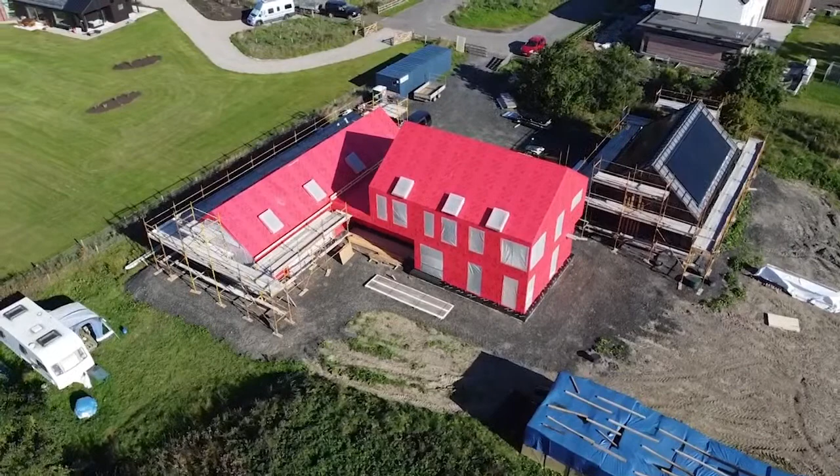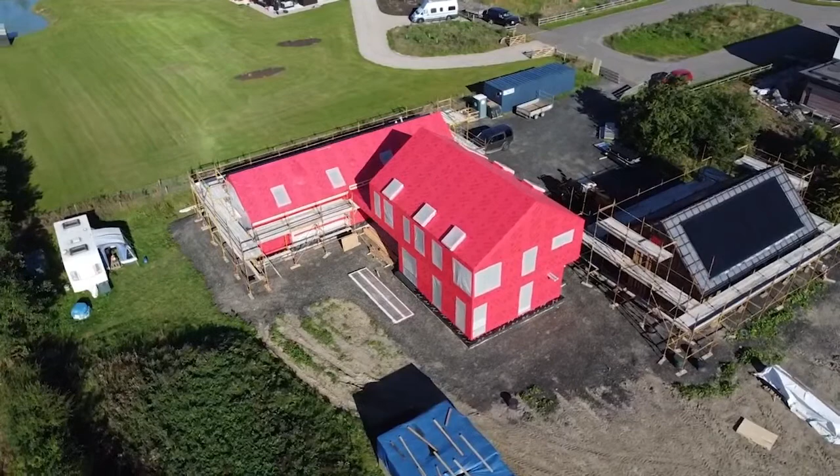Good morning. My name's Frances Strachan-Friar and I'm a Perthshire-based architect working mainly in residential projects and one-off private houses. From that background, designing and building my own home presented a perfect opportunity for a learning exercise, exploring new construction methods, testing ideas and learning new skills by taking a fully hands-on approach on site.

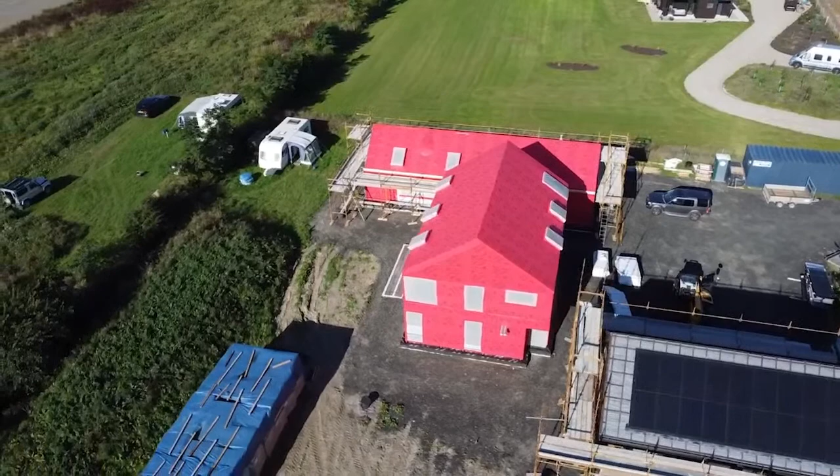We started looking for a suitable site in 2019 with nothing specific in mind beyond a rural site with a few neighbouring buildings, within easy commuting distance of both of our jobs, and most importantly, the site and the location had to just feel right.

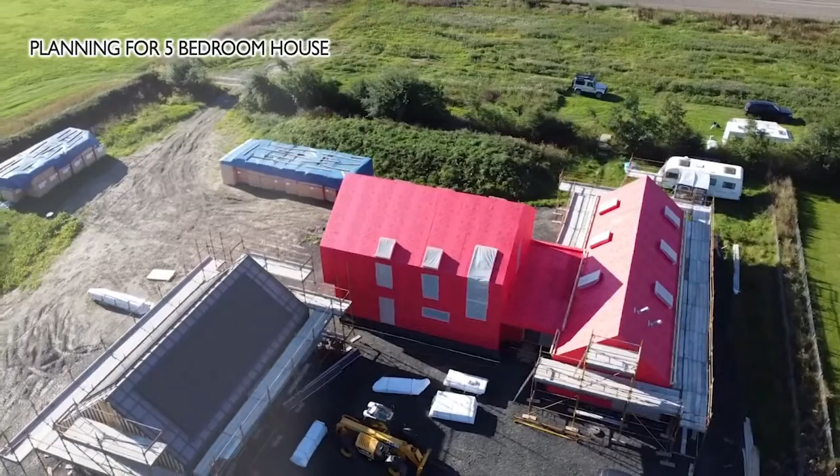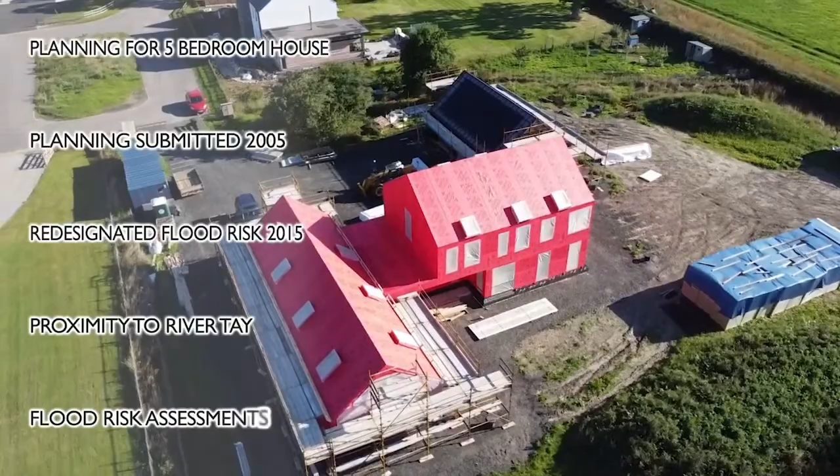The plot at Charleston Farm already had planning permission in place for a 5-bedroom house, but this was submitted in 2005. Subsequently, in 2015, the site was redesignated by SEPA as a flood risk area, being relatively close to the River Tay. In addition to changing the house type to the new design, our resubmitted application also had to provide a flood risk assessment. This entailed demonstrating the proposed dwelling would sit as far as possible outwith the affected area and the construction would be of a flood resilient type.

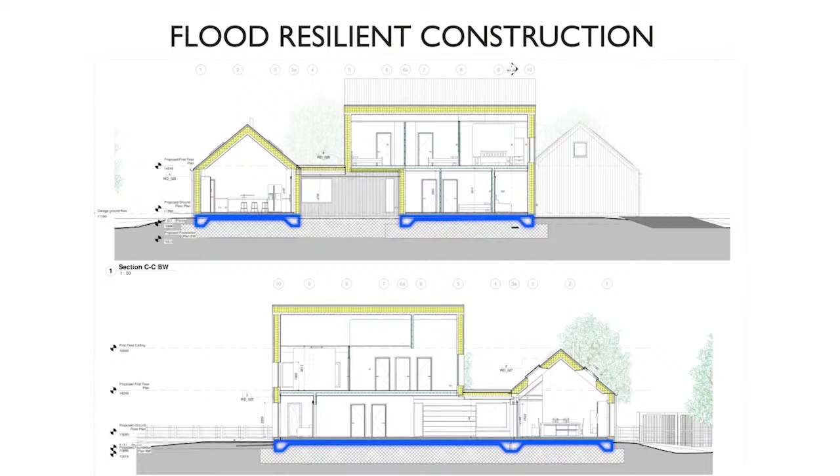Following our ground investigations, the structural engineer proposed a raft foundation which would help address the areas of poorer bearing pressure on the site. This type of foundation also lends itself really well to CLT, as the wall plate can be fixed directly to the slab and the frame erected relatively quickly without the need for blockwork subwalls.

The recommendation from the flood risk assessment for the finished floor level was 600 mm above the adjacent 1 in 200 year flood risk level plus the 35% climate change allowance. This meant our finished floor level was almost a metre above the existing ground level. Having the flood risk assessment done early meant that we could address this aspect and work the detailing into the project at an early stage. Fortunately, this part of the process went smoothly and the new planning approval was granted in May 2020.

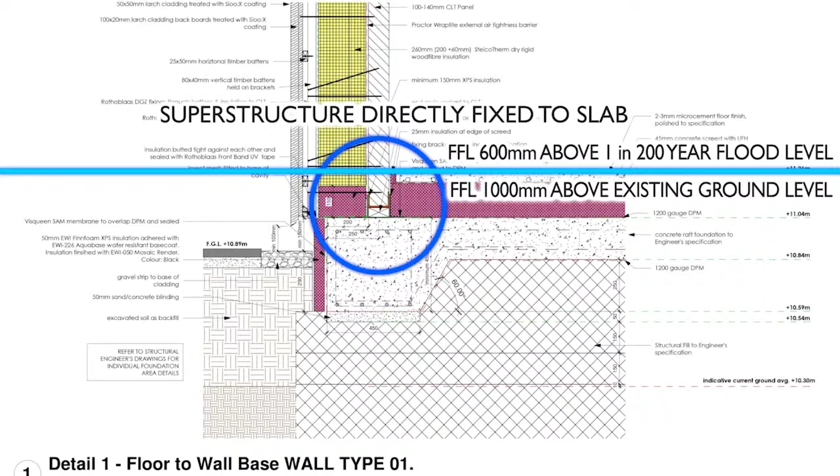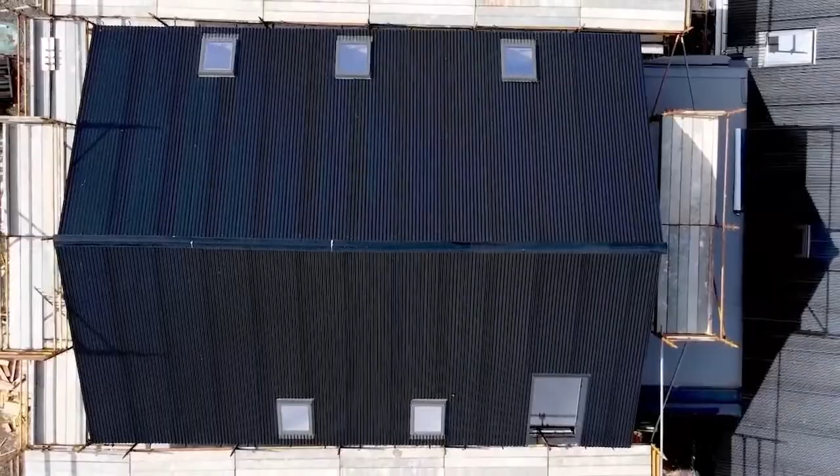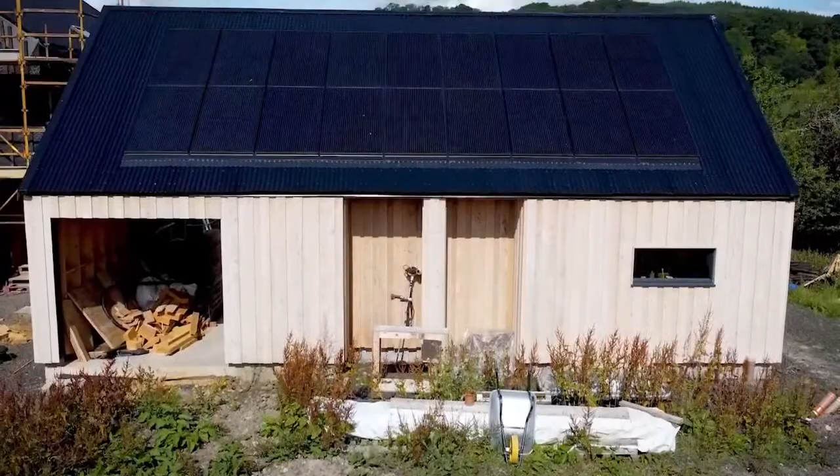The design of the house was very site-specific and aimed to sit well with the neighbouring properties which were built in 2016 and 2019. Both of these homes are bespoke architect-designed properties and the overall aesthetic of the development is in keeping with the rural vernacular. We also wanted to connect to the previous use of the site, which was a dairy farm, and the simple pitched roof barn style of the house with metal-clad roofs is an ode to the old byres that once stood on the site. We were keen to use locally sourced materials wherever possible, and the larch cladding was supplied by the sawmill at Knapp, which is around 5 miles away from the site.

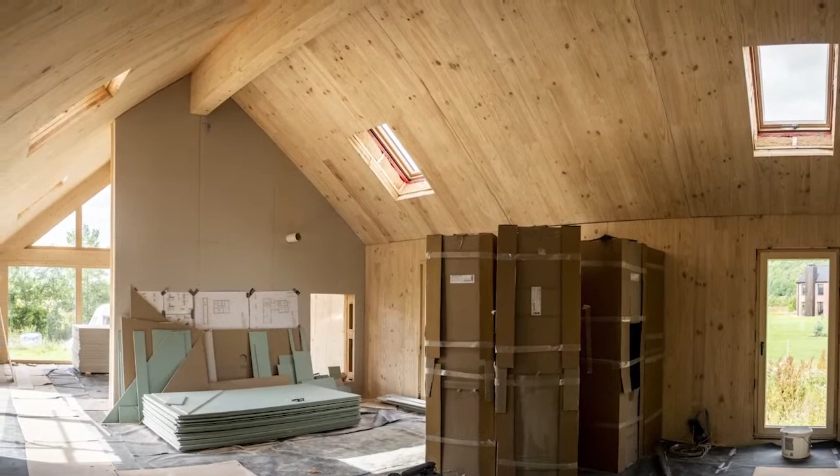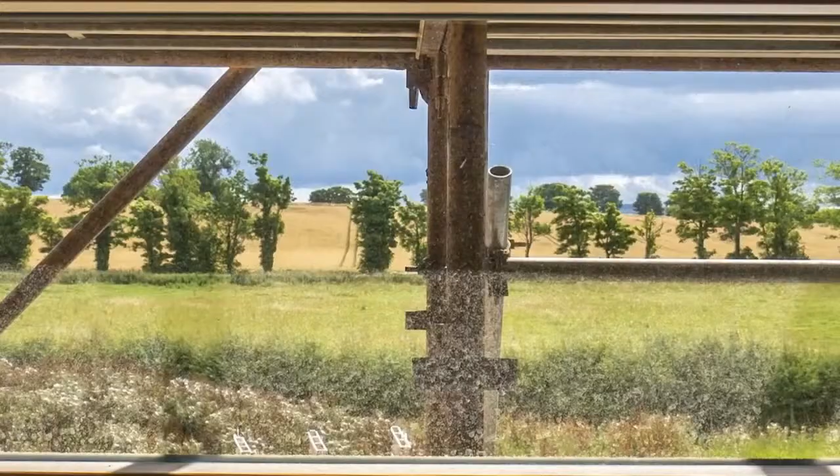This local agricultural context of the site provided a wealth of inspiration, and the simple forms of traditional farmsteadings, byres, sheds, barns and cottages never fail to create interesting spaces. The simple geometry of these structures also helps frame different views of and from the site, and the main spaces are focused on the garden side of the plan, which allows passive solar gain and captures the views across the fields. Managing this passive solar gain was an important consideration on this project, with the aim to cut the overall energy consumption of the house as far as possible.

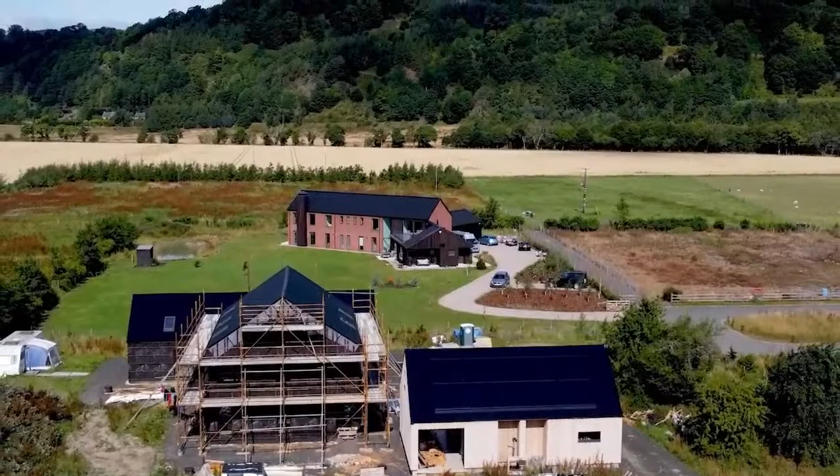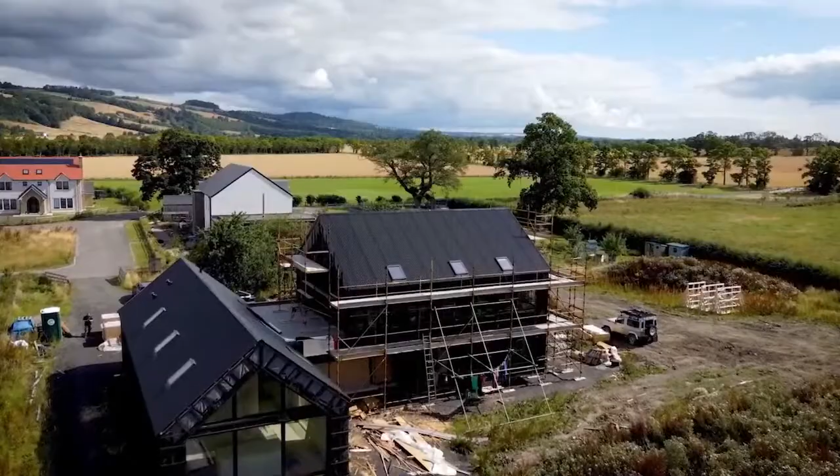At the time of designing the house, I had started to become more interested in passive house design and the technical aspects of designing to the passive house standard. Having never worked on a certified passive house before, I decided to use the process of designing and building my own house to explore the possibilities of low energy design and working with passive house principles.

While we ultimately decided not to go down the route of a fully certified passive house, we aimed to achieve as close as possible to the passive house standard as we could and to work continuously to identify areas where improvements may be required as we worked throughout the build.

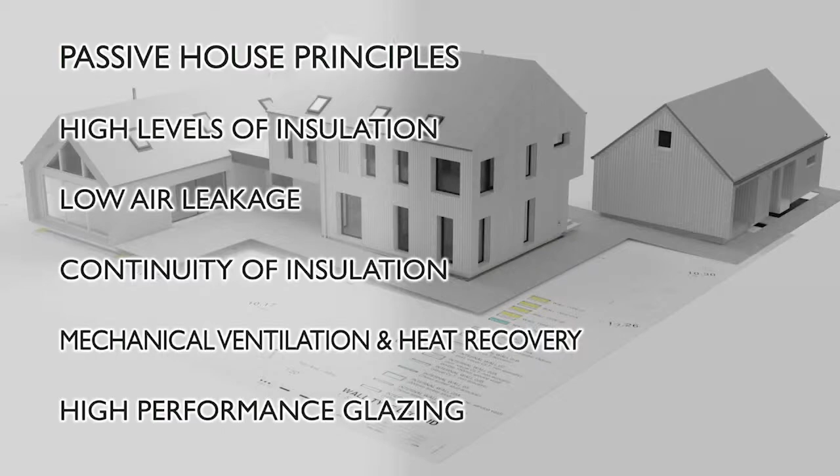The core principle of passive house design is to minimise heat loss from the insulated envelope by combining high levels of thermal insulation with low levels of air leakage. The continuity of the insulation is also important, as is high performance glazing. The windows we chose are triple glazed and the principal rooms are kept south facing to maximise the solar gain into the property.

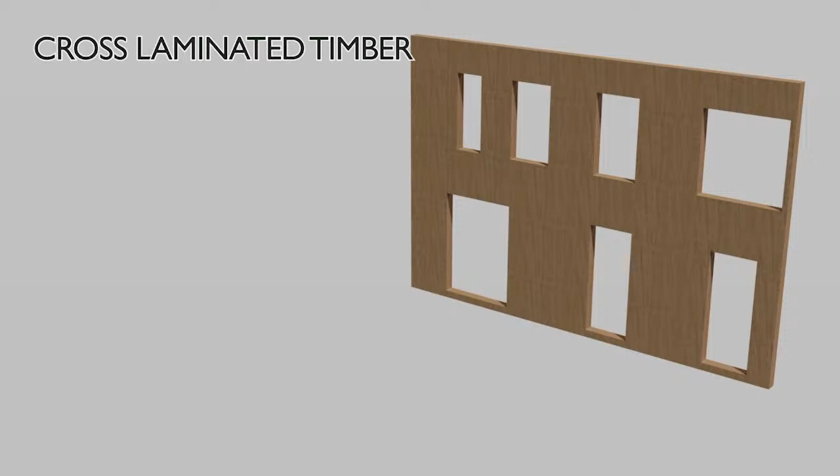To maximise the efficiency of the thermal envelope, I chose to use a cross-laminated timber or CLT structure. These structural panels, which are made up of multiple layers of machined timber, are fabricated off-site and then craned into position when they arrive, making for a very quick construction process.

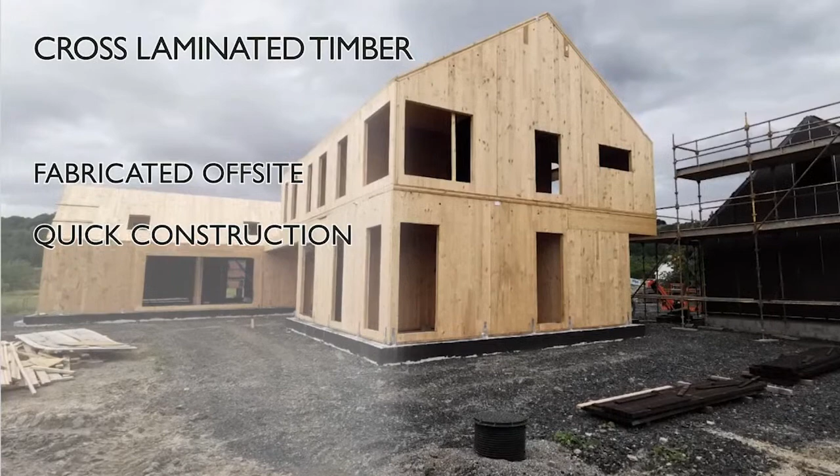Being timber, the CLT panels are a more natural product than a foam-based structural insulated panel, and for me, they present a tactile and aesthetically pleasing internal surface which reduces the need for plasterboard dry lining.

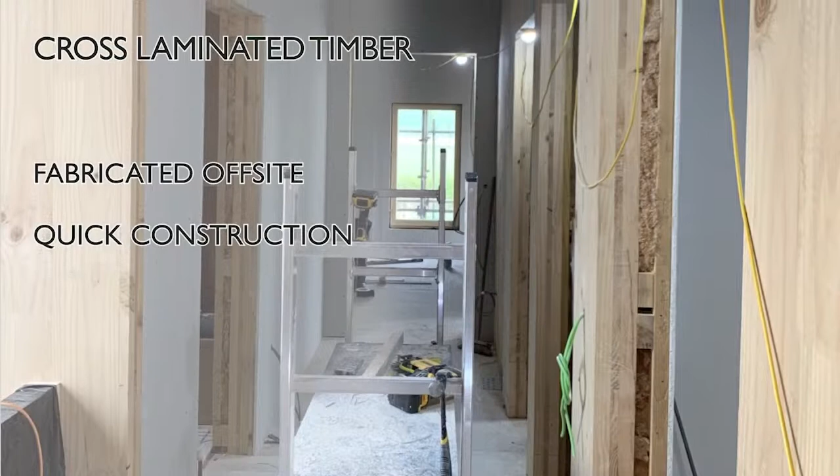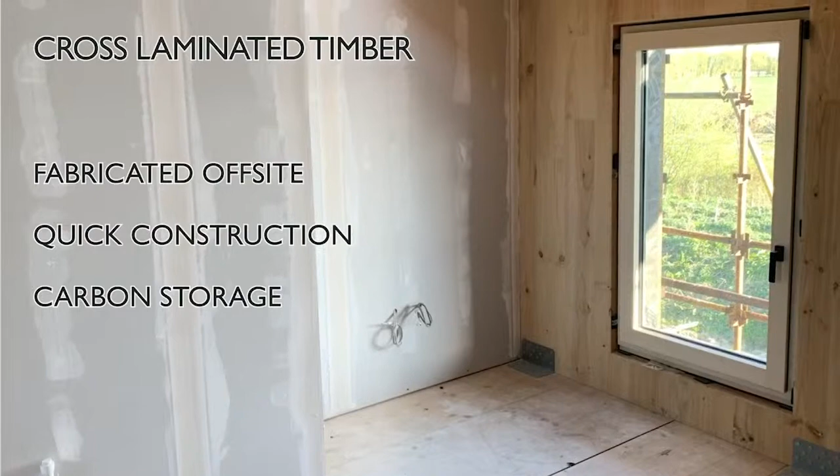Cross-laminated timber, along with other mass timber construction systems, also has a variety of benefits in sustainable architecture, not least because the trees used to make the panels store carbon, which is then locked up in the timber construction for many years. The engineered nature of the panels also means that they can replace a lot of components that may otherwise require concrete or steel to be used.

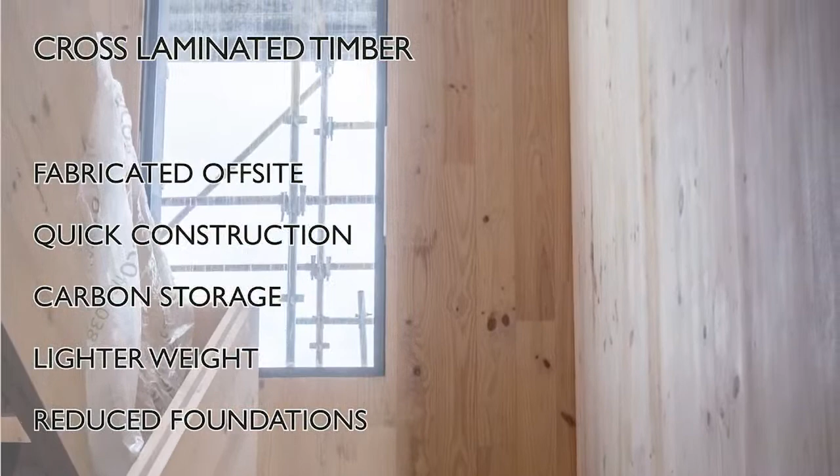The lighter weight of the superstructure can reduce the amount of high environmental impact concrete required for foundations, as well as the site preparation associated with this. Cross-laminated panels are more commonly used in mainland Europe than in the UK, and in fact this project was the first time our Spanish CLT fabricator had worked in the UK.

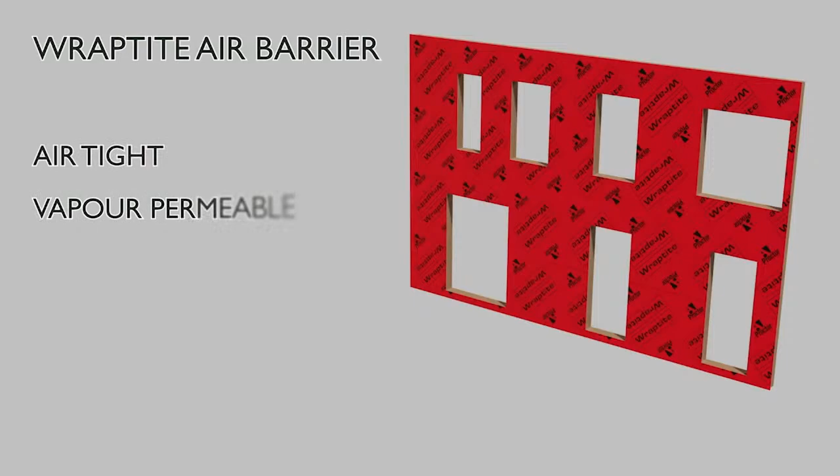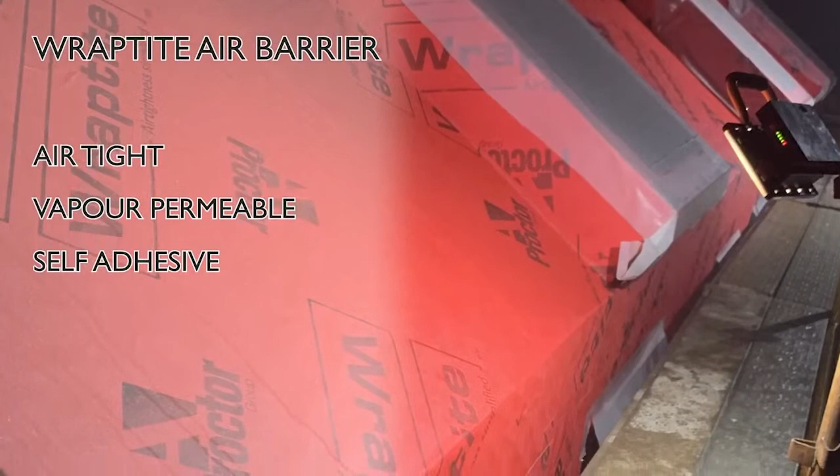Onto the CLT base, we applied the Wraptite airtight and vapour permeable membrane directly onto the surface of the panels. By wrapping the building entirely in this membrane, we were able to quickly and easily achieve a continuous airtight seal around the insulated envelope, as very few surface penetrations were required in the airtight layer.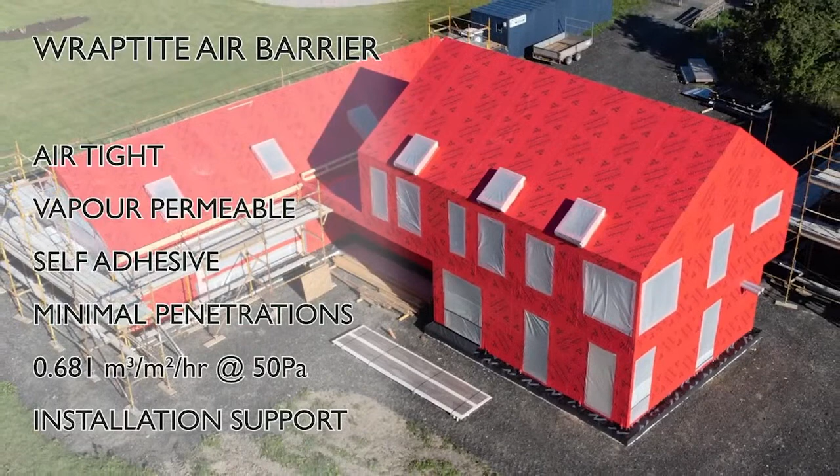This simplicity helped us achieve a final air pressure test result of 0.681 metres cubed per metre squared per hour at 50 pascals. Considering we hadn't installed an air barrier before, we were really happy with that result. Like most of the manufacturers whose products we installed, Proctors were great in providing help and advice throughout the process. We had a toolbox talk from the team prior to starting, and the process was pretty smooth and painless.

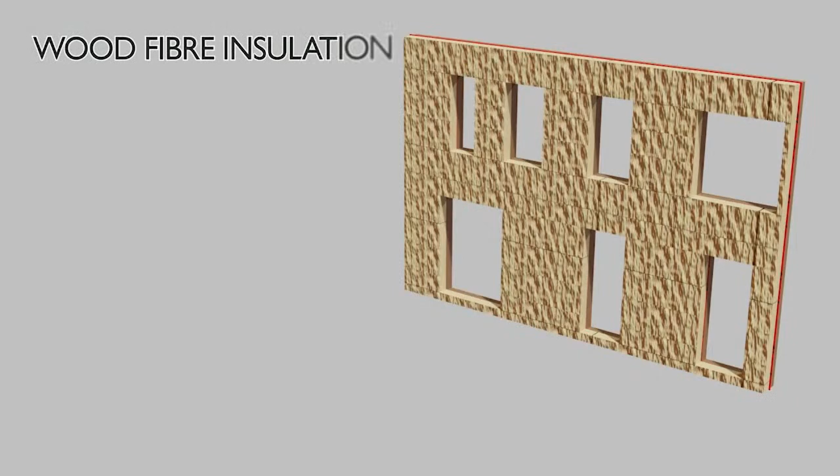Over the barrier membrane, we fitted wood fibre insulation, again keeping to natural materials where we could. We used 260mm on the walls and 280mm on the roof to achieve a U value of 0.11 in the walls and 0.10 to 0.12 across the different roof areas. This was fitted using thermally broken fixings because the CLT panels form the structural support. The insulation layer is almost completely unbroken around the building, which reduces any thermal bridging.

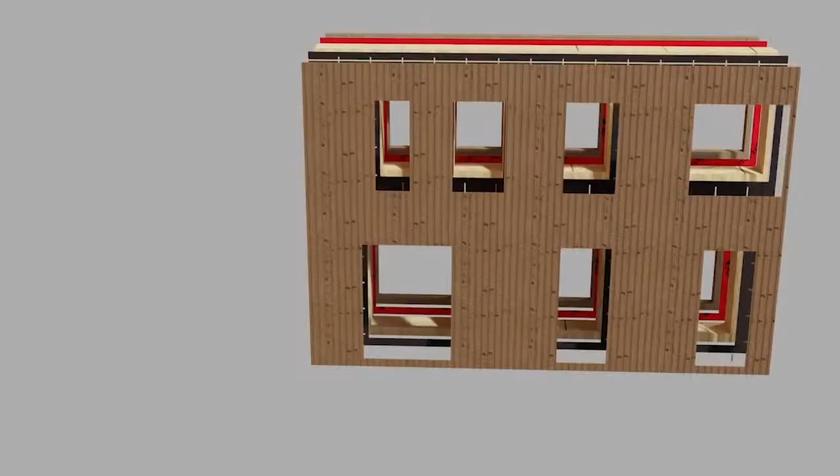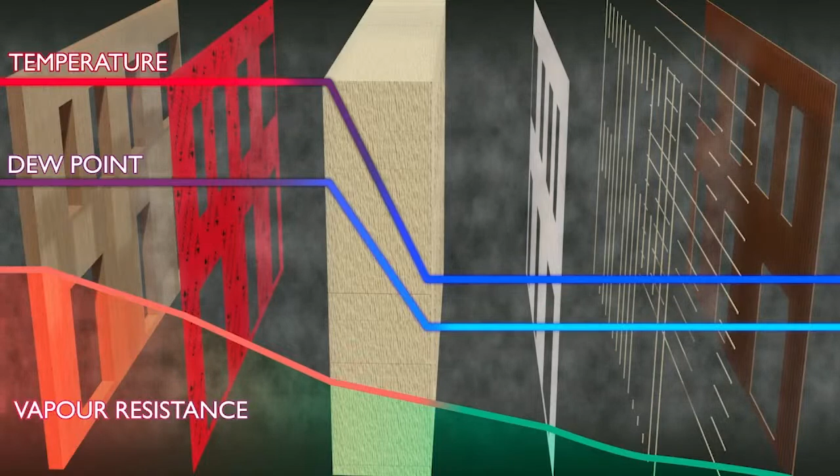This permeable insulation over the permeable Wraptite air barrier over a relatively vapour-resistant inner panel gives the building good hygrothermal characteristics, with the outer layers allowing moisture to escape evenly and ensuring a healthy indoor environment, while the inner layer slows down the ingress of moisture into the structure and limits the scope for condensation risks. CLT structures with high levels of external insulation like this are very good in this respect, as the more vapour-resistant CLT panels are kept warm by the insulation layer with the temperature remaining well above the dew point.

Indoor air quality is further improved by the use of a mechanical ventilation system with heat recovery, which uses heat from the exhaust airflow to pre-warm incoming fresh air. This system ensures that sufficient air changes are achieved throughout the living spaces without dramatically affecting the energy performance.

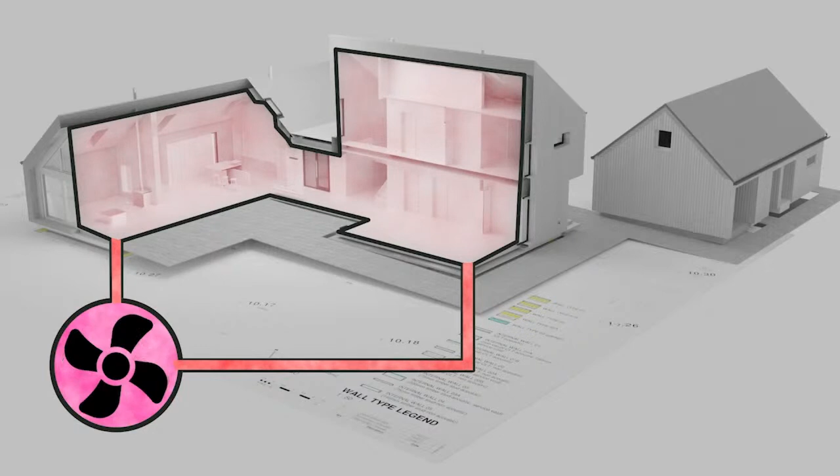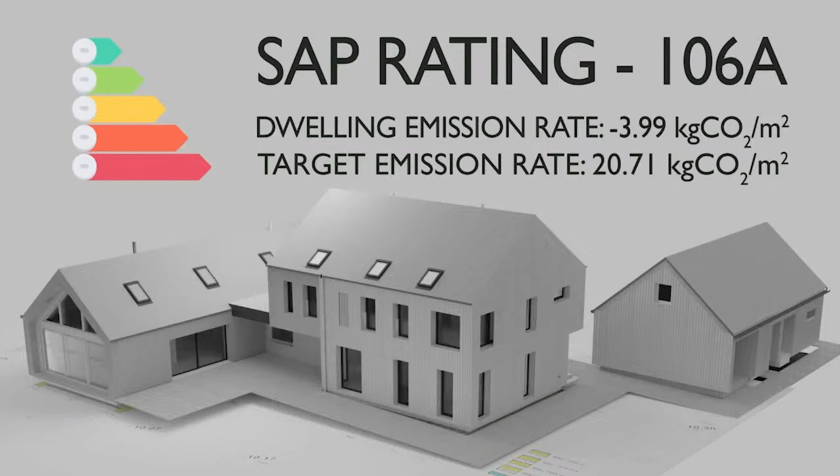Our focus on a high-performance, fabric-first approach to energy performance meant we achieved a 106A SAP rating with a dwelling emission rate of minus 3.99 against a target emission rate of 20.71. This negative emission rate is a product of the high efficiency of the building envelope combined with the extensive use of mass timber and wood fibre throughout the building. We were extremely happy in being able to achieve such a good result, having undertaken so much of the installation ourselves.

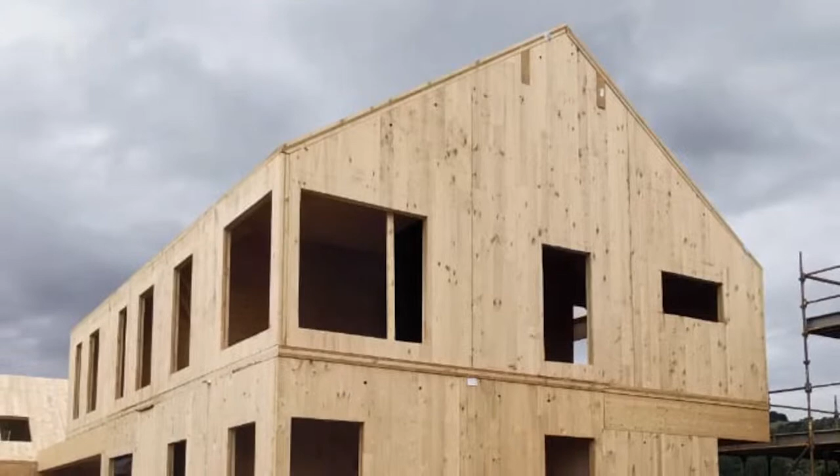Especially having been learning skills as we needed to progress the build. We decided from the outset of the project that we wanted the build to be a learning process, not just in terms of the design approach taken and the technology specified, but also to take the opportunity to be far more hands-on with the construction itself than is usually possible for an architect.

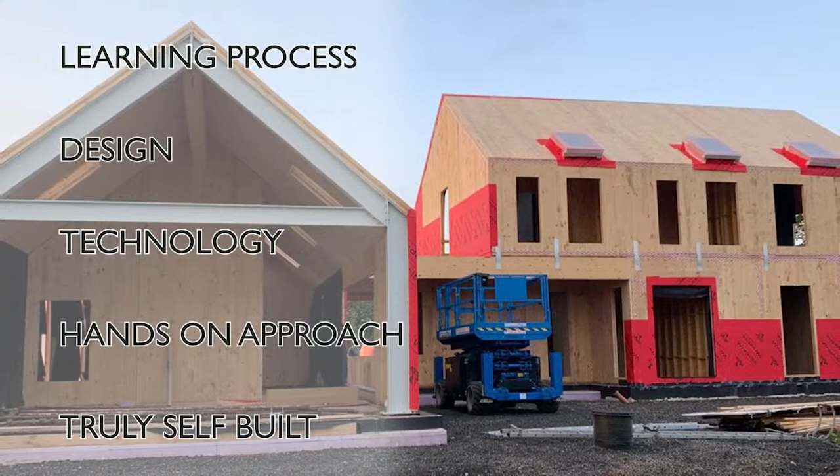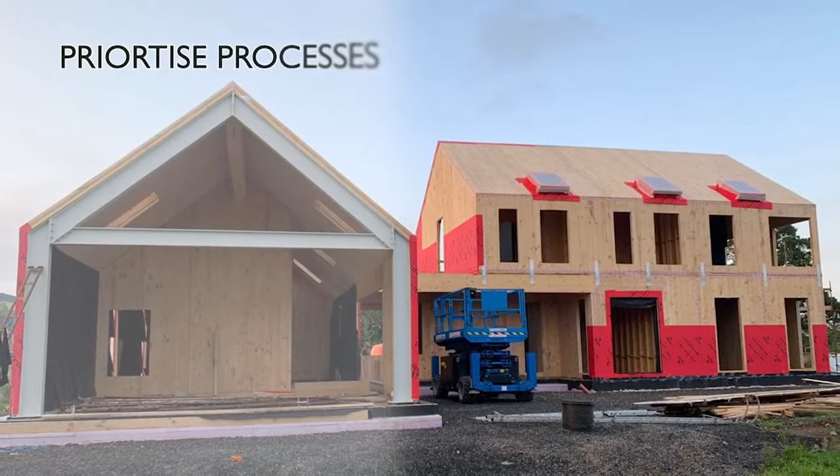While there are inevitably some tasks, such as electrical work, where a certified professional is required, and others, such as foundations and the erection of the CLT panels, which necessitate the use of heavy machinery, our aim was to attempt as far as possible to truly self-build the house. This gave us a bit more control and flexibility over costs, in that we could prioritise processes that required a faster turnaround and take on less time-critical processes ourselves.

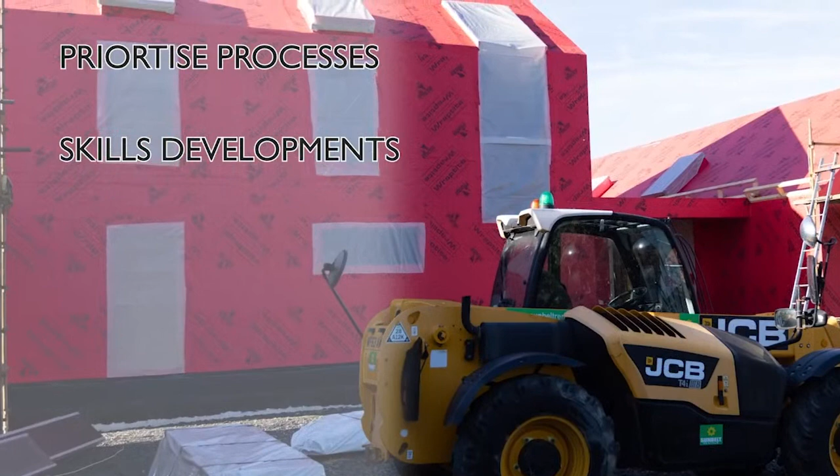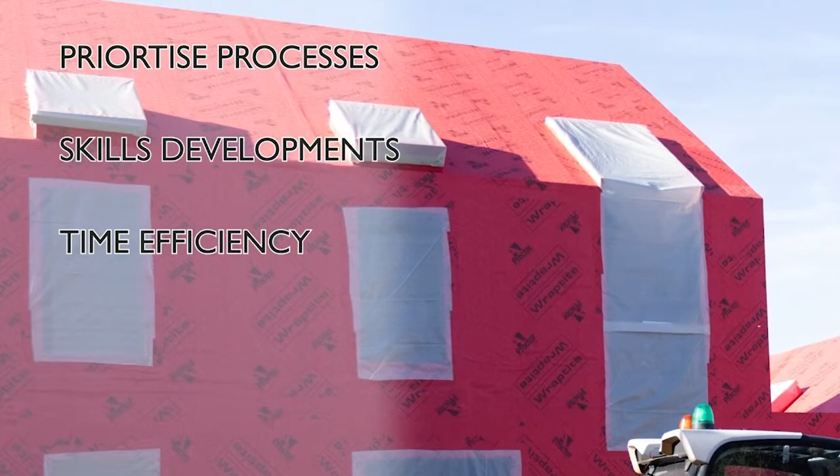Inevitably, tasks we undertook ourselves were a lot slower, not least as all the work had to be fitted into evenings and weekends around full-time working. Learning all the necessary skills also took time, and in hindsight, we didn't always approach tasks in the correct way, and certainly not in the most efficient way. This is probably one of the main time savings associated with experienced contractors. The knowledge of the quickest and most efficient way to proceed with a job isn't something that can be gained quickly, however hard you try.

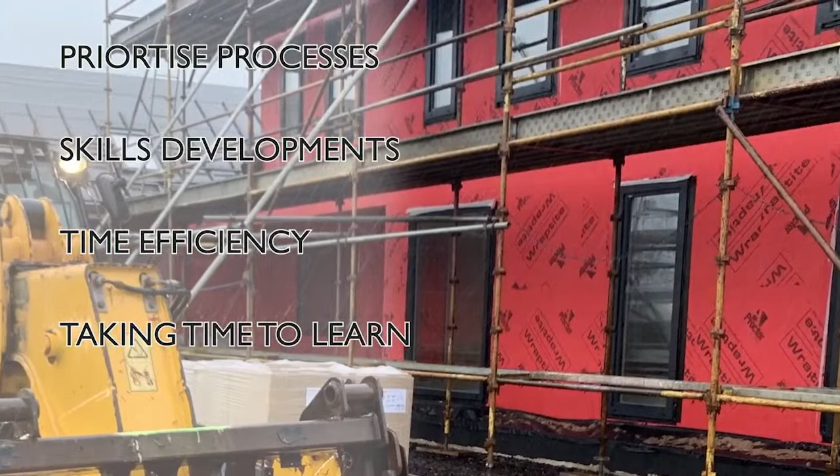Fortunately though, because we were doing the work for ourselves, that allowed plenty of time to be taken to ensure we got the right result, even if the route there wasn't optimal. Manufacturers and suppliers generally provided good resources to explain the process, and YouTube is a fantastic resource for informal training. 99% of the issues we came across, we were able to find someone who had not just had the same issue, but who had also made a video of how to address it.

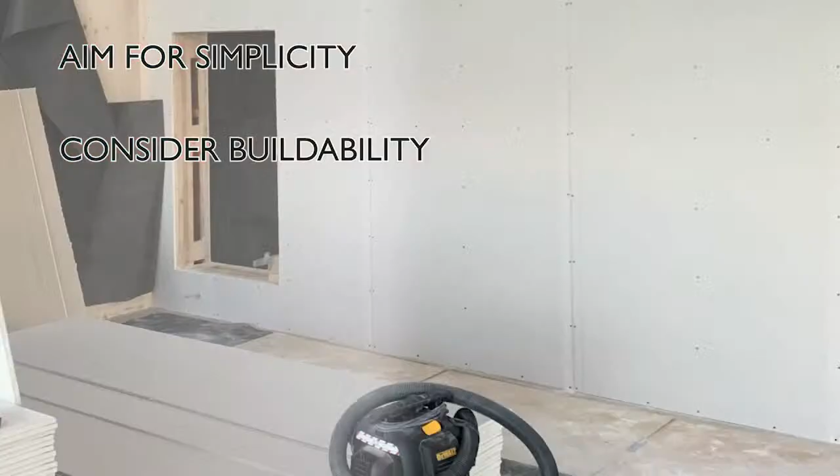This learning process has fed back into my approach to design in a few ways. My approach has always been to aim for a site-specific design and keep things as straightforward as possible, as simplicity always works best. Being able to apply the detailed design to practical situations and adjust and amend them to reflect the skills we gained along the way was a great opportunity to gain a valuable insight into the build process. This appreciation of the process is something that will prove useful in future discussion with contractors.

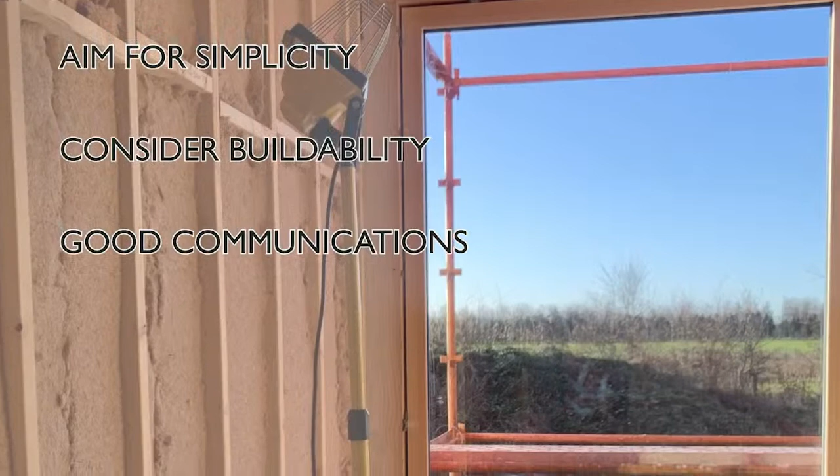I think having good communication with contractors is key to ensuring things can be built in the best possible way. The way an architect has drawn something may not always be the best way to build it, so there has to be a bit of give and take. As long as design decisions are openly discussed on site and both parties are willing to learn from each other, the end result will be something to be proud of. So while it was good to have the freedom to take decisions and understand directly the implication of those decisions, the lack of feedback from a third party occasionally impacted on the cost, time and practicalities of the build.

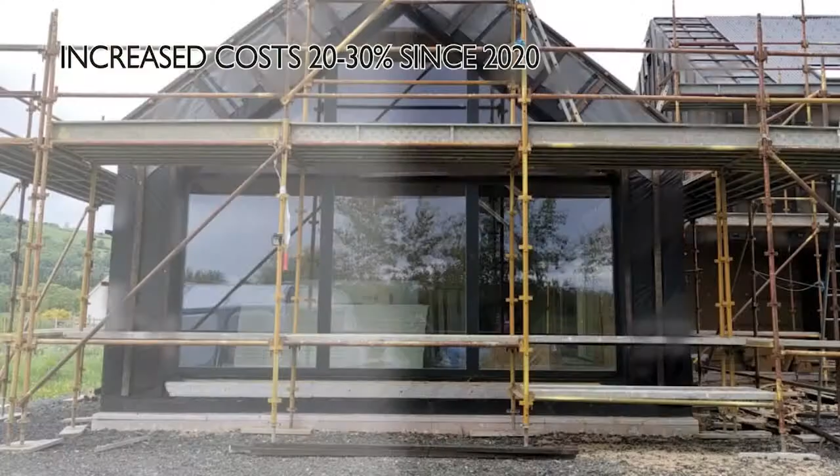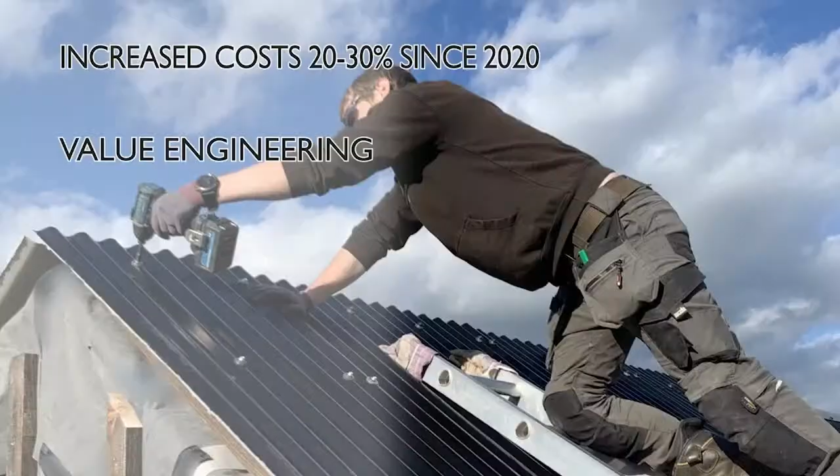As is the case with more or less every self-build project, cost was a really important concern here. While some cost overruns are inevitable as a project progresses, in this case the wider economic situation since 2020 has increased costs across the whole build by around 20 to 30%, which has been really difficult to accommodate. For the most part, we were able to do this by value engineering some items and taking on more of the work ourselves, but doing this also increased the likelihood of running into additional costs due to the extended timescale.

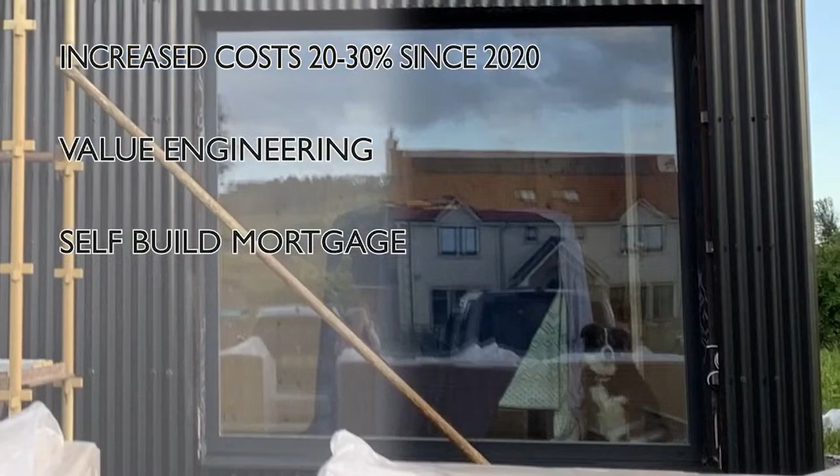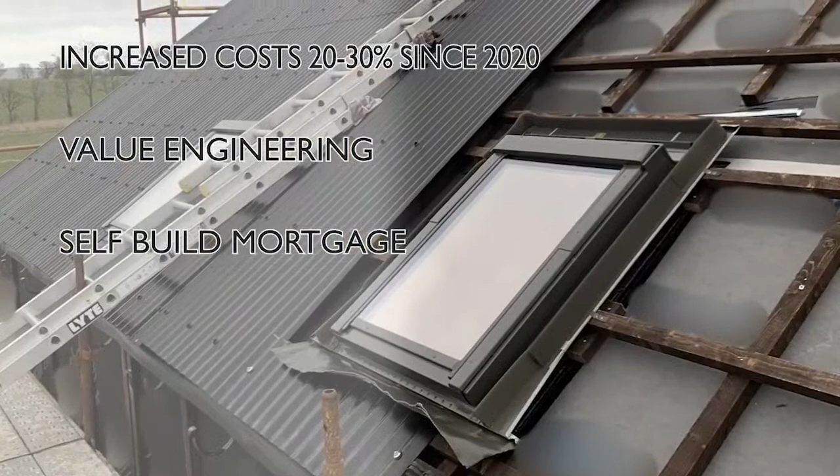To help fund the build, we opted for a self-build mortgage. Due to the nature of the CLT frame and off-site construction, it meant our choice of lenders was quite limited. We used a self-build mortgage broker to set up our mortgage, and once the lender was agreed, the process was relatively straightforward. The stage release milestones were agreed at the start with the lender, and we have 2 inspections once we reach each stage by separate surveyors, along with an inspection by a professional consultant, who in this case is another architect. Under the ARB and RIBA guidance, I cannot self-certify my own project, as this would be a conflict of interest.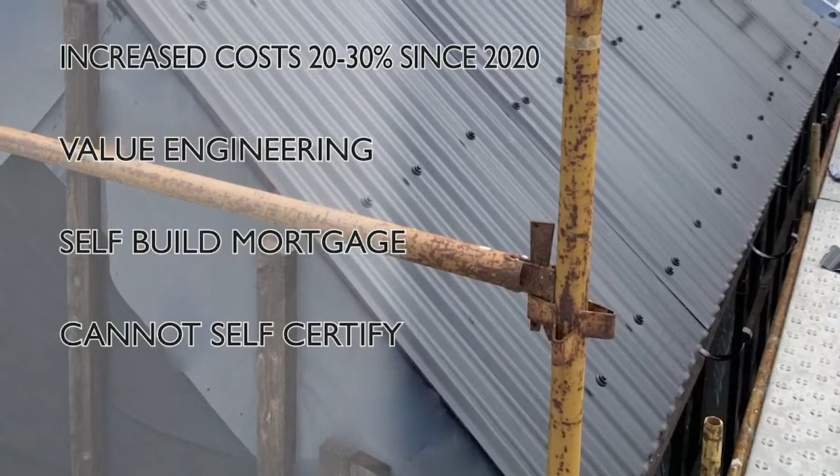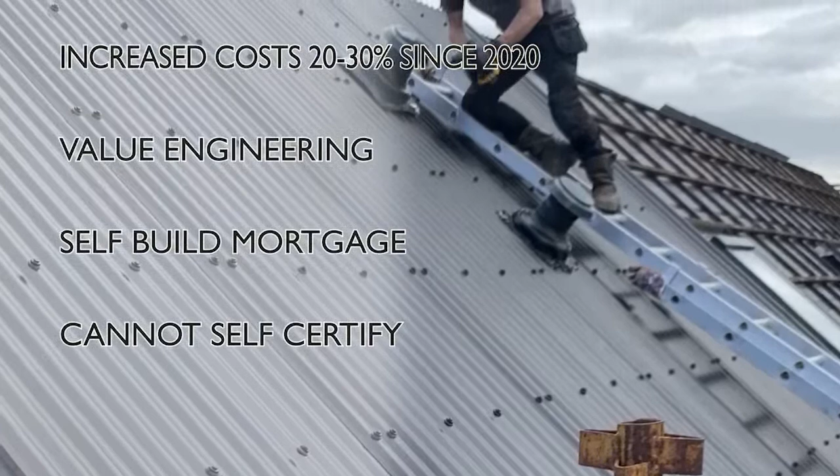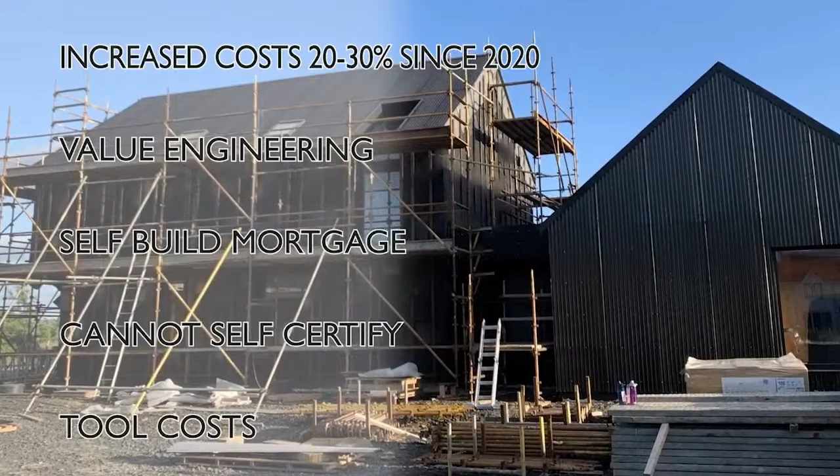With a self-build mortgage, the interest rates are slightly higher, so once we have completed the build, we'll be able to move to a standard mortgage. So this serves as good motivation to keep things moving forward. Tools in particular were also an area where we didn't expect costs to be as high as they were, or didn't fully appreciate the items that would be required. Because we only had a very basic selection of tools at the start of the build, we had to spend quite a lot to make sure we had the right tools to complete a variety of tasks on site correctly.

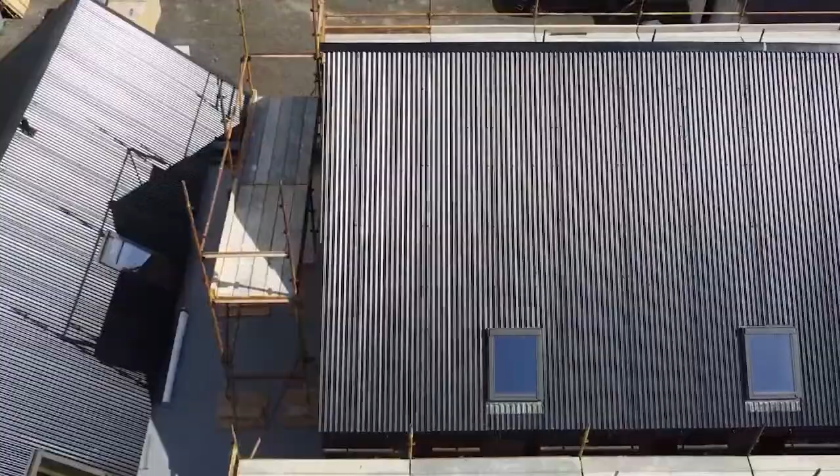Wherever possible, we did try and buy second-hand items, and we do plan to sell these on once we finish so somebody else can have the use of them. In other cases, undertaking work ourselves resulted in us undertaking tasks that were simply awkward and where the satisfaction of completing the job did not outweigh the problems along the way.

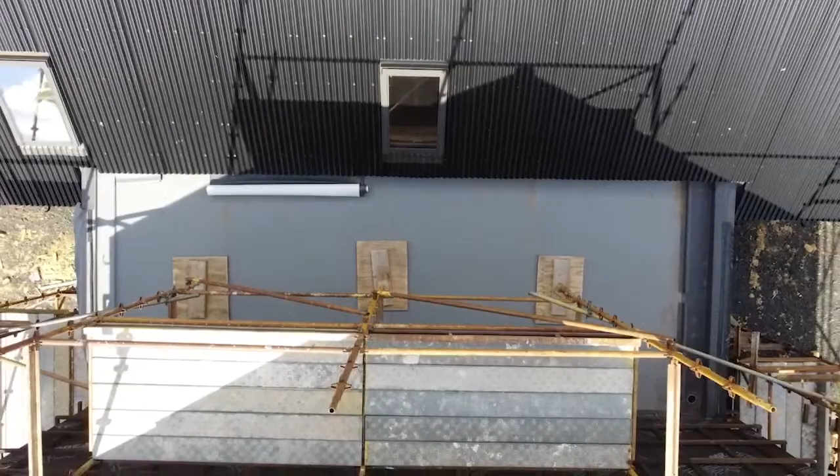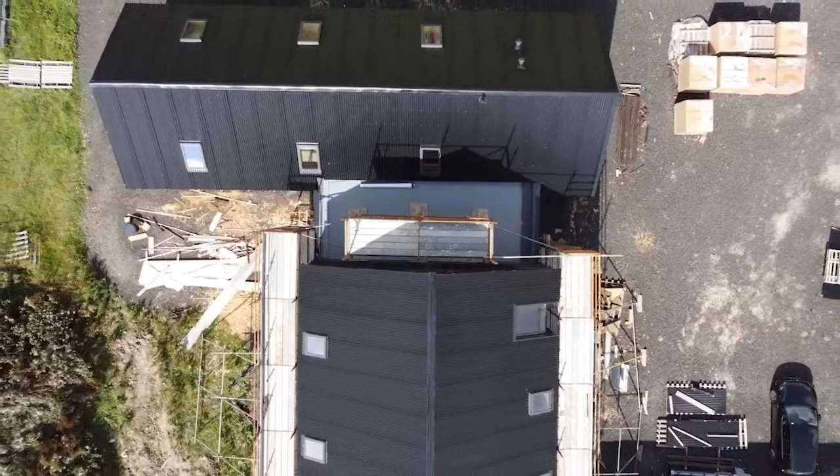A particularly good example of this was installing the large corrugated metal roof sheeting for the roof and the walls. While these were an important part of both the weather protection and the overall aesthetic of the house, the relatively exposed nature of the site made manually handling these panels in windy conditions particularly tricky.

Cutting and shaping the corrugated panels correctly and ensuring all the trims, flashings and other accessories required were fitted and aligned properly was also an area where our learning curve as first-time installers was a little steeper than we would have liked at times. On the other hand, plasterboarding, plumbing and scaffolding were some of the more fun tasks we undertook, where the learning and satisfaction outweighed the hard work.

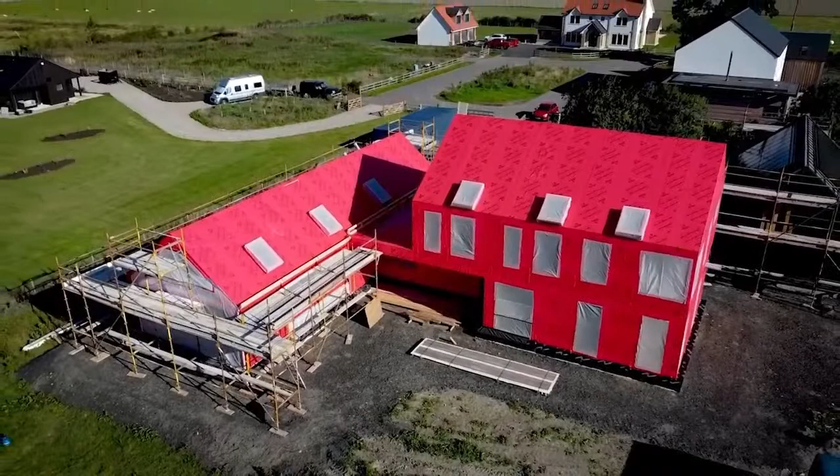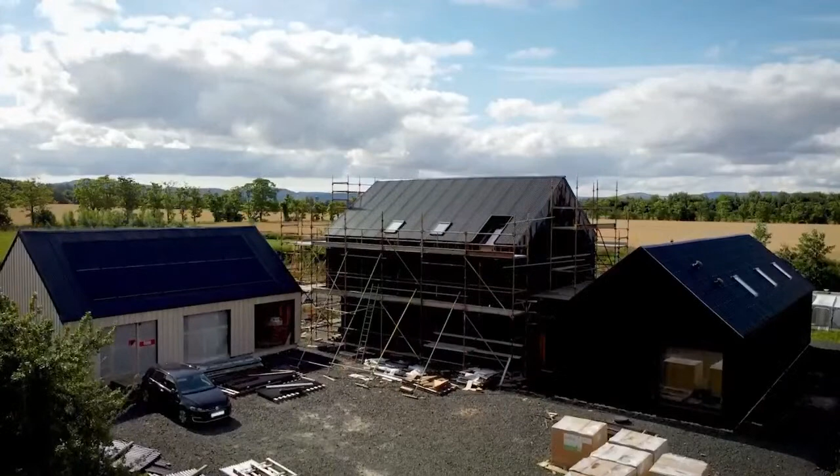Overall, the project has been a fantastic experience, and it's really allowed me to gain in-depth, practical site experience that's invaluable to my professional practice. I think the feeling of accomplishment and pride in our work will be something that we can look back on, and the knowledge that we physically built our own home will bring a great sense of achievement and satisfaction. We're continuing to work on the house, and we hope to be able to move in before the end of the year. Thank you very much.